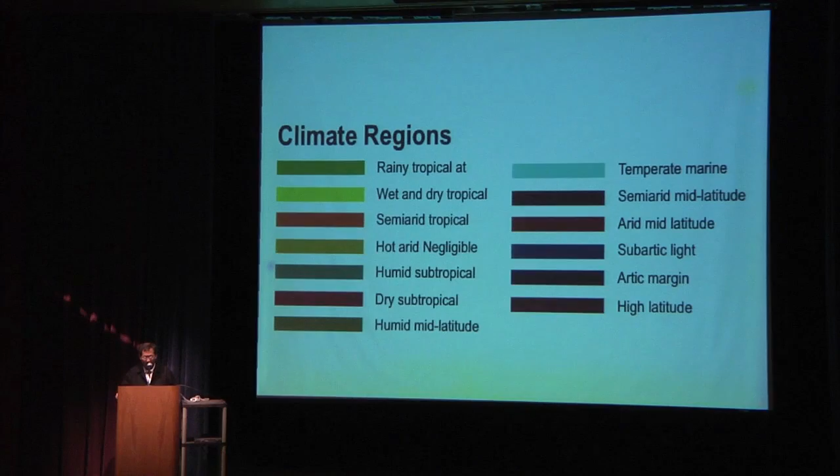Designing to the climate of the locality is another word for bioclimatic design. For me, as a green designer, as an eco-designer, bioclimatic design provides a good starting basis for green design as a passive mode, low-energy design.

If you shape the building right, or design it bioclimatically as a passive low-energy design, then anything else you add to improve its energy performance enhances its performance. But if you don't get the configuration right, you'll have to correct some of the decisions you made earlier, which makes total nonsense of designing a low-energy building. So I see this as the starting basis.

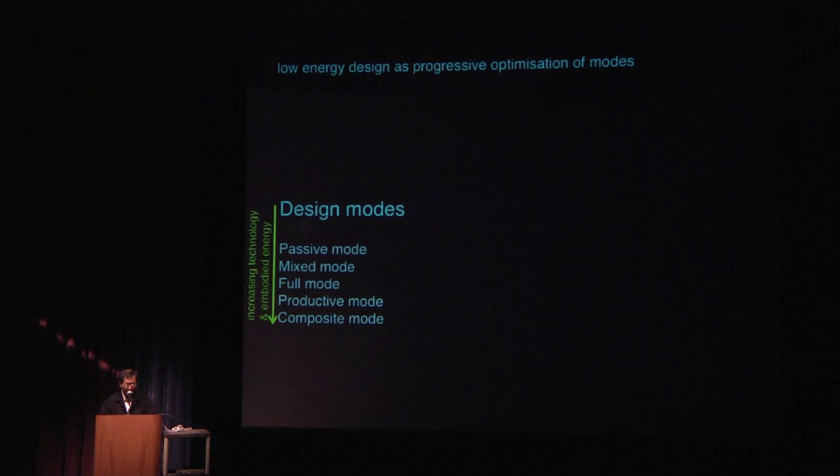Passive mode means improve comfort conditions without the use of any mechanical electrical systems. Mixed mode means improve comfort conditions with some mechanical electrical systems. Full mode would be a conventional building which is full mechanical electrical systems, and productive mode is where you start to produce your own energy, where you use renewable energy sources. Composite mode means you use different modes in relation to the seasons of the year, which would be particularly applicable in temperate zones and cold climates.

And so the basis for climatic design is really comfort. Rather than bore you with figures: passive mode means improve conditions over the outside without any mechanical electrical systems. Mixed mode means some partial mechanical electrical systems, like the use of ceiling fans, for example, meaning an enhanced level of comfort. Full M&E systems, or full mode, would be conventional. Productive mode means you're dependent on the source of energy, the ambient source of energy. And composite mode depends on the variation you adopt for the different seasons of the year.

So this, if you like, is a basis for design, for designing low-energy buildings. Let me just start by looking at passive mode. That means improve comfort conditions without the use of any mechanical electrical systems.

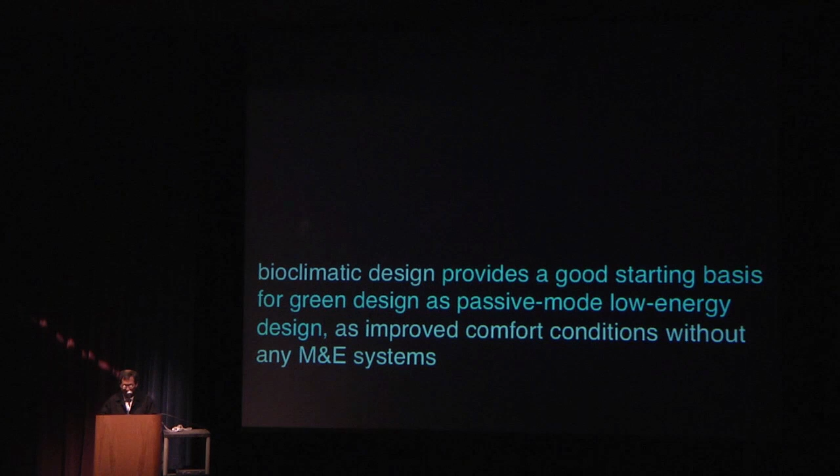You have three seasons in a year, or four seasons: summer, spring, autumn, and winter. Rather than put spring and autumn separately, I put them together and call it mid-season. Essentially, in most climates in the world, you have a slightly higher temperature in summer, in some places extremely hot, and cold in the winter. In your case, it's not that cold, but possibly this winter could have been the coldest you've experienced.

The horizontal line is full mode. That means the engineers, when they design the heating and cooling system, try to have a consistent comfort level throughout the whole year. The red line shows hot in the summer and cold in the winter. Now, when you implement bioclimatic design, you improve the comfort conditions a little bit in summer, a little bit in winter, and mid-season it is comfortable for a greater part of the mid-season—that's passive mode.

Now, what is clear from this diagram is that there's no way passive mode can compete with full mode. So let us have no illusions about bioclimatic design—it can never equal the same comfort level that you experience with full mode.

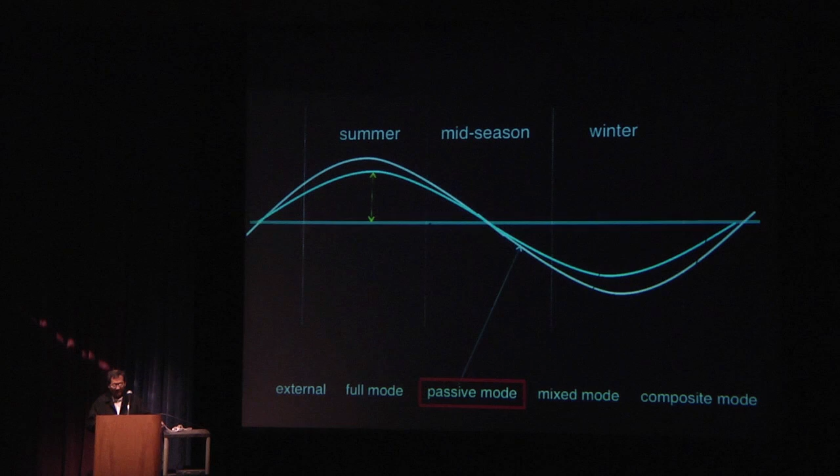Now what does this tell us? This teaches us that if we're happy with improved comfort conditions, as we used to be in the past before air conditioning and heating, then low energy design is a lifestyle issue. That means if we as human beings are prepared to accept a little bit hotter in the summer, a little bit colder in winter, or wear warmer clothes in winter—well, not exactly naked in the summer, but you don't need any mechanical electrical systems.

Bioclimatic design, back to this definition again, is designed to relate to the climate and locality as a passive mode energy structure and by building configuration.

Here's an example of a project. This project's in Kuala Lumpur, which is about 2.9 degrees above the equator, in the humid tropical zone. It's a high-rise building, about 30 plus stories, which I finished a few years back.

This is the sun path for Kuala Lumpur. Well, not exactly, I couldn't find it on the internet, but this is the sun path at the equator. Kuala Lumpur is 2.9 degrees above the equator, so more or less the same. What you see as the characteristic in this sun path is that the sun is essentially east and west, and so those are the hot sides of the building.

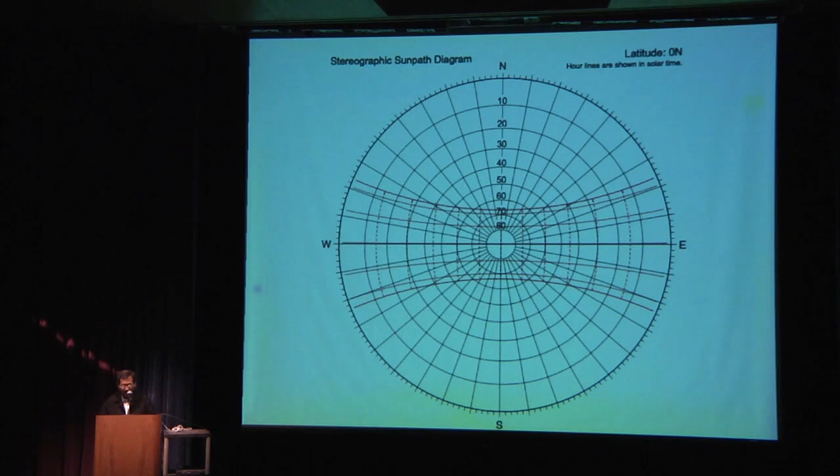I'm not able to put in a temperature profile, humidity, and rainfall in this presentation, but those are aspects influencing the design. If you just look at sun shading, the sun is east and west, and that's the hot part of the building. So when I designed this building, that's the floor plate.

I orientated north, so you can see north is exactly vertical here. The hot side is east and west, and that's where I put the elevator cores, the staircase, and the toilets, so that these serve as buffers between the outside and the inside, taking in the heat, the solar insolation, from the east and west, and from the roof.

You need something over the roof. Then, to enhance its energy performance, I have naturally ventilated toilets, naturally ventilated staircases, naturally ventilated lift lobby, and sky courts that act as sun shading. That, if you like, is my definition of bioclimatic skyscraper - a skyscraper that responds to the climate and locality, in this particular instance, the tropical climate.

By putting the elevators in the lift lobby with an operable window on the outside, and a staircase with an operable window on the outside, you don't have to pressurize the staircase or the lift lobby, which you would if you have a central core in the floor plate. Pressurization means you have to extract smoke and fire in case there's a fire, whereas with the lift lobby and staircase facing outside, the fire authorities will let you get away without pressurizing these elements.

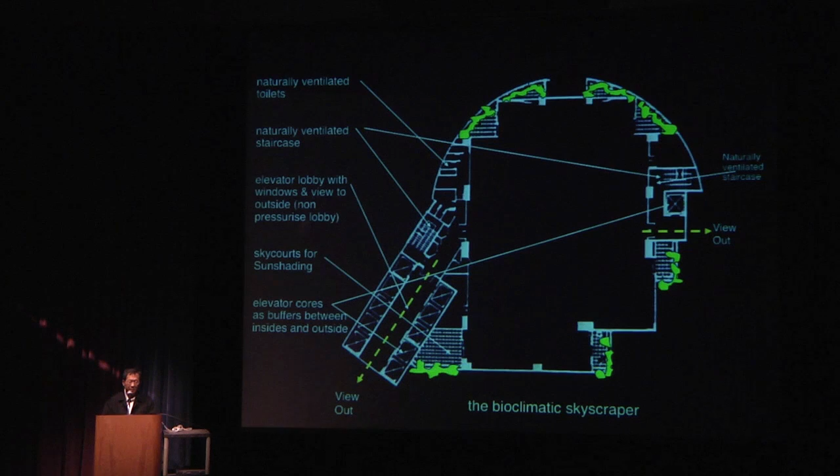Also, by putting the elevators on the outside, you get a view out, which gives you a greater sense of place - when you get out of the elevator, you can see out and say, oh, here I am in Fort Lauderdale or wherever the building is. It gives you a greater feeling of belonging and linking to that place, rather than getting out into a dark and dingy corridor that could be anywhere in the world, or in Baghdad.

So for the hot facades of the building, where I don't have the core, I would put sky courts or sun shading. Usually on the north and south, I don't get an awful lot of sun, so I sometimes have full height glass without any sun shading, but I could push the balcony out a little to give shading for the sun that goes round on the east and west at certain times of the year.

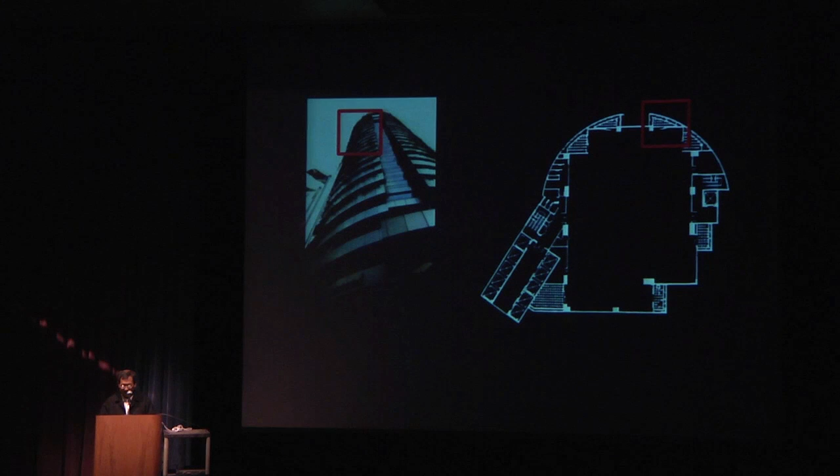I vegetate the sky courts and use vegetation as a means of enhancing the cooling effect on the building. Vegetation studies have shown that vegetation reduces the ambient temperature around the facade of the building where you have it. So I try to cover the building with vegetation. Besides, putting vegetation enhances the biodiversity level of the locality, which is something we should try to do in most, if not all, of our buildings.

I hadn't concluded then that having an ecological connectivity or nexus is better for ecological design. So the second diagram was the one that I adopted in this building.

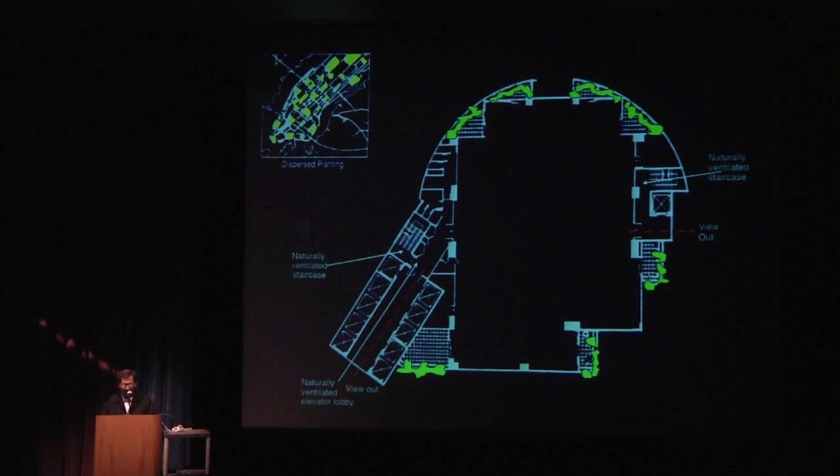You can see the vegetation in the balconies, and the balconies actually go beyond the permitted plot ratio. Sometimes when you put balconies in buildings, you can tell the client that this gives you opportunities to expand later on when the plot ratio increases, or if you want additional office space, you can fill up these balconies.

Back to this definition again, bioclimatic design. Then I've added one other item, which is to take advantage of the ambient energies of the locality. That means every locality has local energy that you can use to your benefit.

In this case, one possible ambient energy is wind. This shows the effects of wind at different urban locations: the first in the urban location, the second suburban, and the third in the open country. The wind exponentially increases as you go upwards. Beyond a certain height, beyond 600 meters or so in the case of urban location, it doesn't make an awful lot of difference—it remains the same, but that's the effect of wind.

So I wanted to see whether I could use wind to cool a skyscraper. The project really started when I had a client who was really mean with his money, and he said, can you design me a skyscraper, a tower on this site, without any air conditioning? I said, I suppose I could do that, if you take the air conditioning out.

Then he said, what else could you do? I said, I have to keep the windows. His idea was that he wanted the people who occupy the floors to come in with their own air conditioning condensers. So I gave a bracket outside the facade where they can put a condenser, and some sun shading to hide the condenser from the outside. That was the system we proposed.

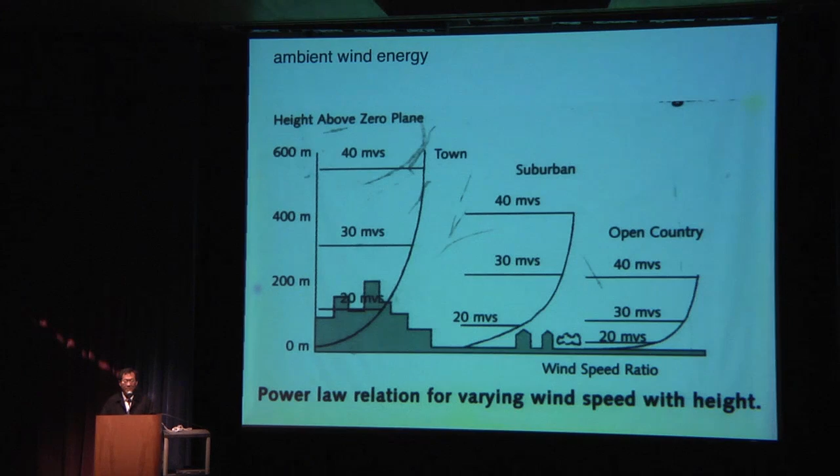But then I said to my lads, why don't we try and design this as a possible naturally ventilated skyscraper using wind. So this was the design for the building—a little bit cranky, but that was me in those days.

That's looking at it sharp on, and that's where the two blades, if you like, are what I call wing walls, to capture the wind. I call them wind wing walls, like a nice Chinese name.

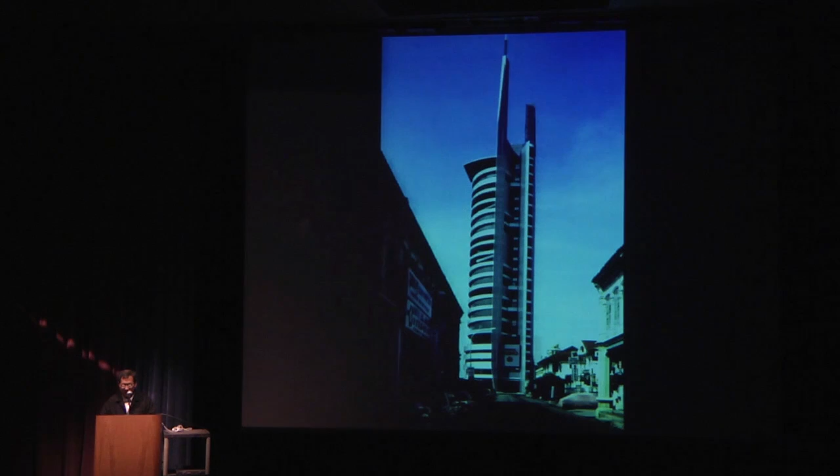So I start by looking at the wind rose for the locality, which you can see on the right-hand side. The wind essentially comes mostly from northeast and southwest, a little bit from the north. It just so happens the site is orientated northeast and southwest, so I lined the building, and that gave me the clues where to put the wing walls.

I started to develop this idea of having a wind pocket, which is like a terrace, with two wing walls on both sides of the pocket that channel the wind in, and where it hits the building I have glass shutters which can open and shut.

This was designed a few years back, maybe about 20 years back, in a building in Malaysia. If this was fully automated it would have been wonderful, but I couldn't get a client to pay for it, and at the time technology in Malaysia wasn't that well developed. Malaysia isn't exactly first world, but it was not third world either—I used to call Malaysia 1.5 world, because you can do a certain number of things, but not an awful lot.

In the bottom diagram you can see the two wing walls, a sort of enlargement of the bottom part of the plan. You can see the elevator cores, the two staircases which are naturally ventilated, and then the wind pockets and the sliding glass, which is where the controls are.

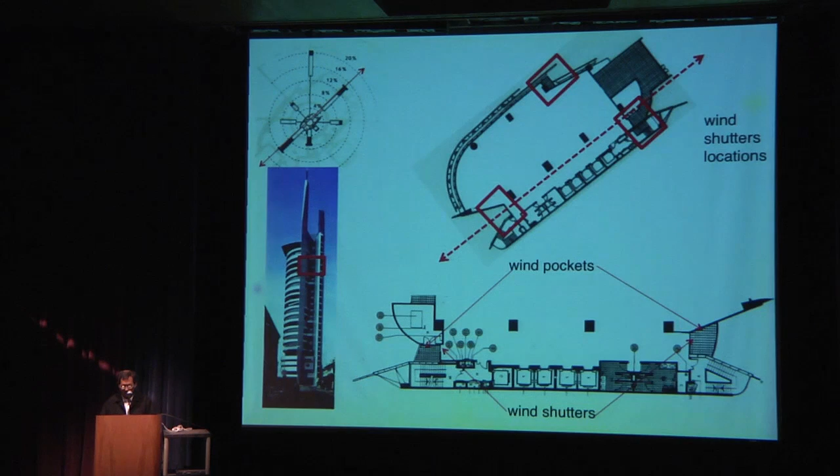So we started to simulate this, and this was done in the late 80s, early 90s. At that time, CFD, computational fluid dynamics, was still very much in its infancy. Of course it's improved a great deal in the last four or five years, where you could actually not just get a diagram, you can see the arrows flying. This was done for me by Professor Phil Jones from University of Cardiff.

And I didn't have the money to pay him, so I said, could you do it for a joke and a pint, which he did.

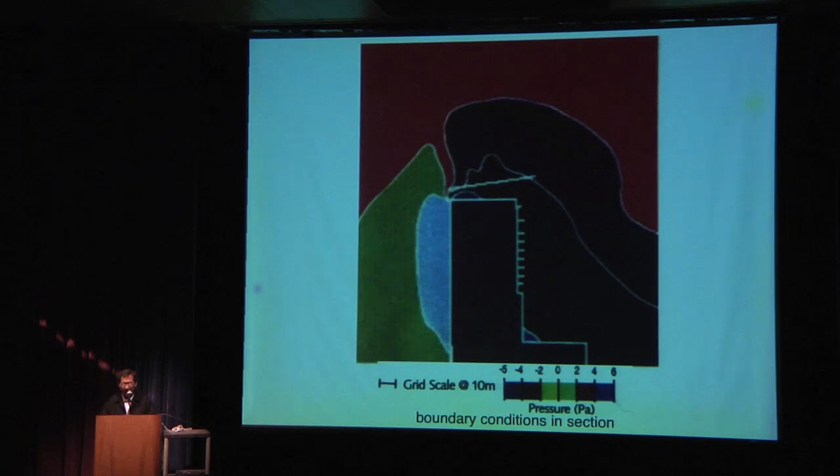And this is the boundary conditions in the section. So next was to look at the boundary conditions in plan. And this is what it is in plan.

And so from there, I started to look at the thermal conditions inside the floor plate. The red squares show where the wind pockets and the wing walls are.

The diagram at the bottom shows the comfort condition when everything's shut. You can see the heat, the red - if you look at the gradation scale on the right-hand side, it's hottish on the inside, and then cooler on the sides facing the outside, obviously because it faces the outside.

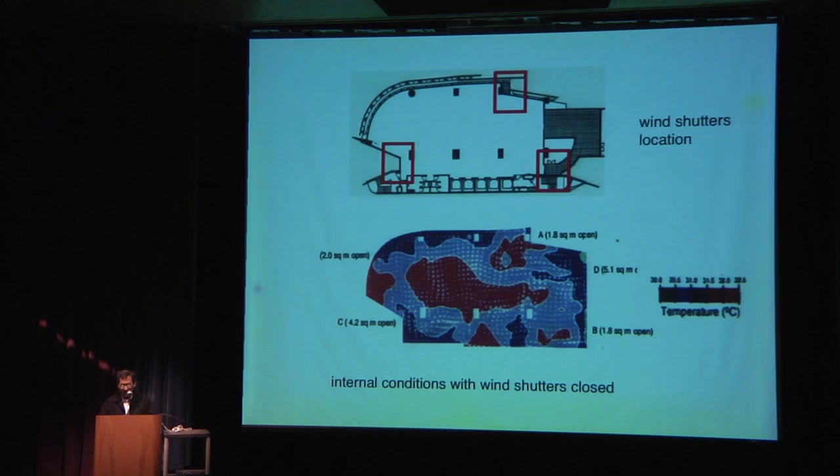So this is, if you like, the idea of a tropical, bioclimatic skyscraper using wind as a means of cooling the building. It's very primitive, it's very intuitive, it's very simple, and through simulation it works.

Now, I haven't been able to do a post-occupancy evaluation to prove these figures. At that time, I couldn't find anybody to do it, but obviously today I have local universities who have a lot of expertise now to do it.

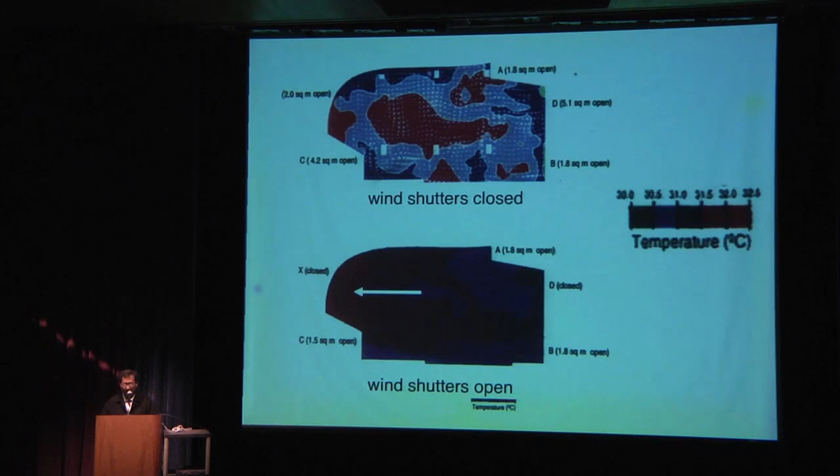So imagine if this was automated, and the shutters automatically open and shut, with a wind anemometer on the outside measuring wind speed, and everything computerized so that every floor is different - because every floor has different wind speeds acting on it, and every wind pocket has different permutations. This becomes the basis of the naturally ventilated skyscraper.

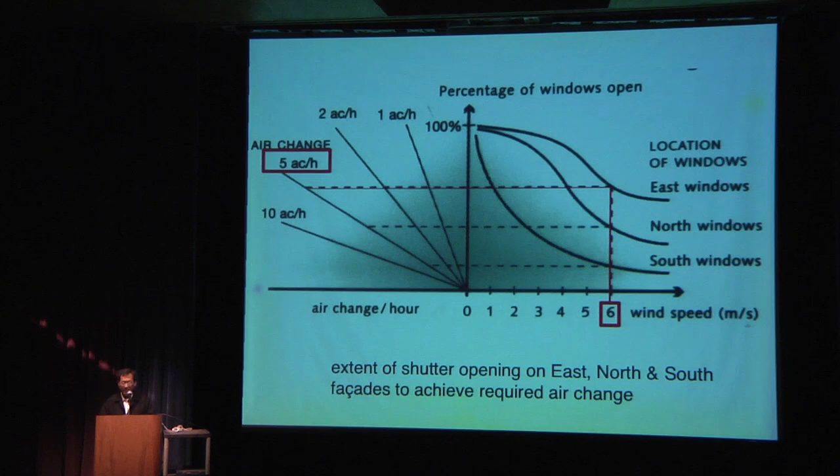Now, what about mixed mode? Mixed mode means some mechanical and electrical systems, which means further enhanced comfort condition beyond what is on the outside.

This is a scheme that we finished about 5 years ago. It's 2 tower blocks of apartments with a retail between the both of them.

Now, this project, from the time I got appointed, took me 15 years before it started on site. So you can see architecture is no man's game, and you must have the stamina to sit it out and not sue the client if he doesn't pay your fees.

In fact, I did 3 sets of building plans for this project, got paid for 2 and not the third one. And on the far left, the building with the step planters was a building that I did much earlier.

It's an IBM building, and you can see the blue stripes reminiscent of the IBM logo. But the client wanted to save costs on the retail. So I said, okay, I'll design you a naturally ventilated retail so that the public areas are not air conditioned, it will be naturally ventilated.

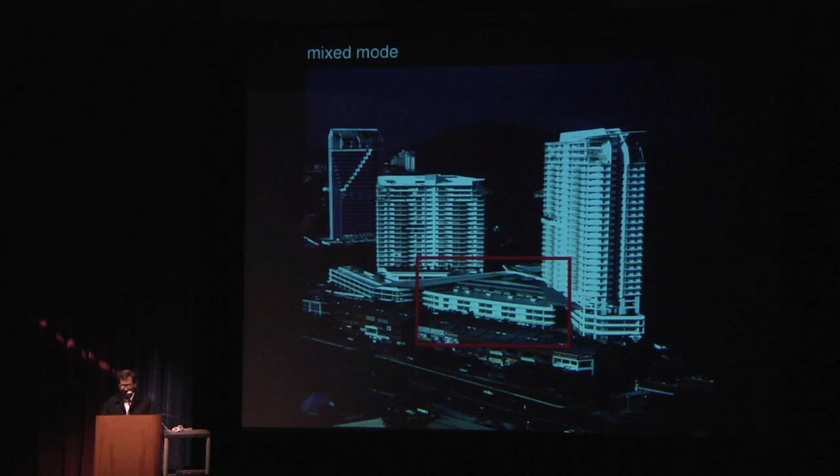What I have is a canopy over the retail area, and the retail has 3 very large wind turbines, if you like, wind extractors, that suck the air out to cool the space below.

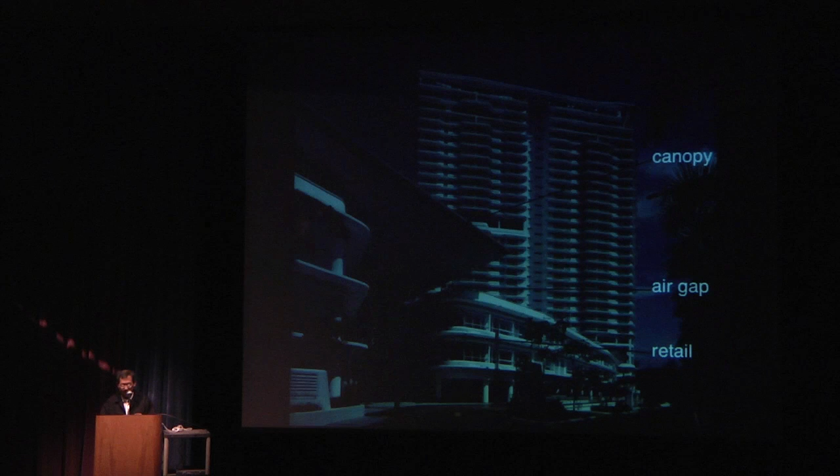If you're looking at the project from the main road, you can see the retail as 3-story units, and then you have this canopy on top, in which there is an air gap between the canopy and the retail.

Inside the retail, inside this canopy, as you look up, there's a skylight, and within the skylight are the 3 air extractors. They're not modest, they're huge, nearly 2 meters in diameter. The central space is where I have an elevator going down to the basement.

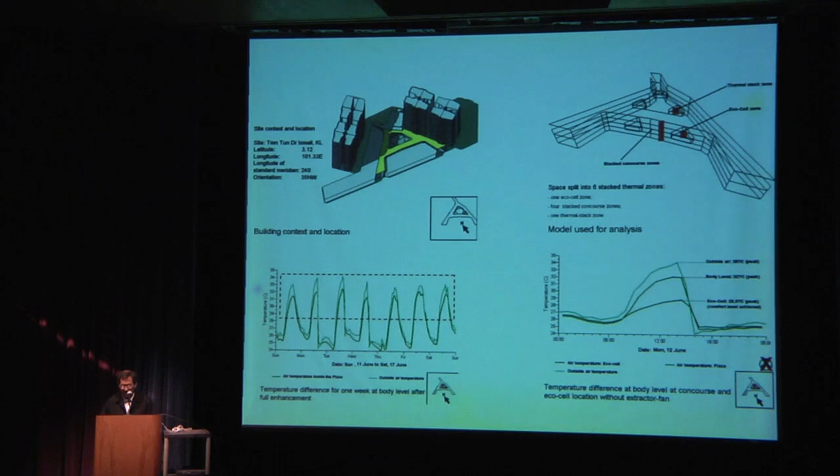So these were some of the simulations done for me. When this was built in 2002-2003, I had Professor Shireen from the International Islamic University in Malaysia, who did her PhD on CFD analysis, and she had a team simulate this for me.

She showed that this could work, and looked at the Y shape you see on the left-hand side, which is actually the public areas inside the retail. The bottom left-hand diagram shows the comfort condition.

The crosses show the condition with the wind extractors shut, and the right-hand side with a tick shows the wind extractors moving. You can see there is some improvement in comfort condition.

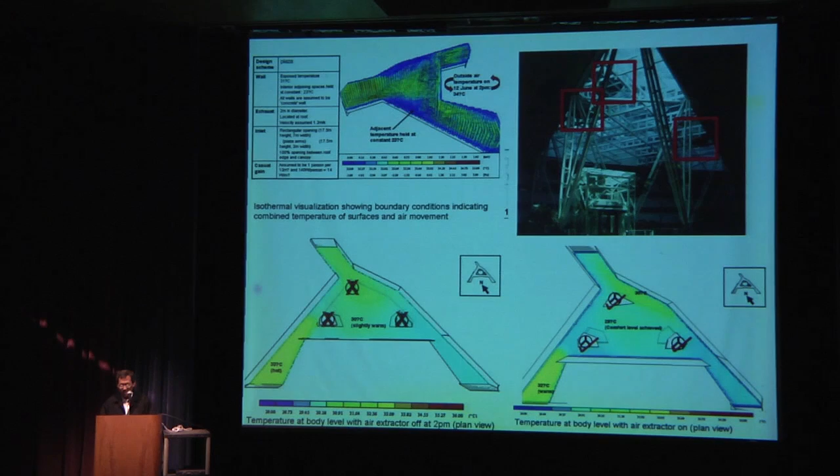From there, we had to modify the design, reducing the gap between the canopy and the top of the retail to enhance its performance. So the simulation helps in the design, but you have to do it through a series of reiterations—simulate, change your design, simulate, change your design.

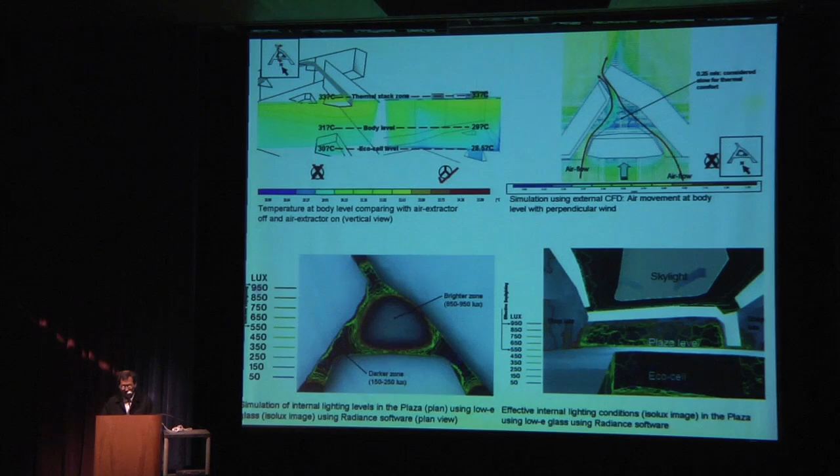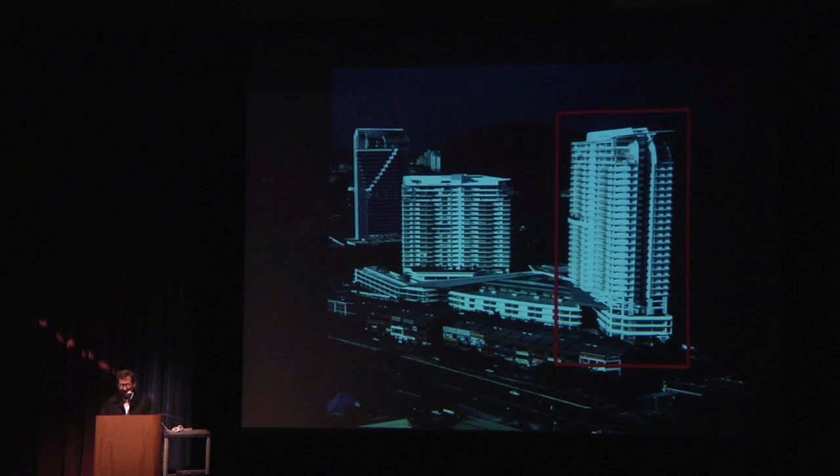The biggest problem of designing apartments is how to get natural ventilation and daylight into the back parts of the apartment, because if you have a corridor that joins the facade to the back wall of the apartments, you don't get ventilation, and you have to mechanically ventilate the toilet or kitchen at the back.

So what we did in this scheme was have a central corridor and then a series of voids that cut all the way down to the ground, to ventilate the toilets and kitchens at the back of the apartments.

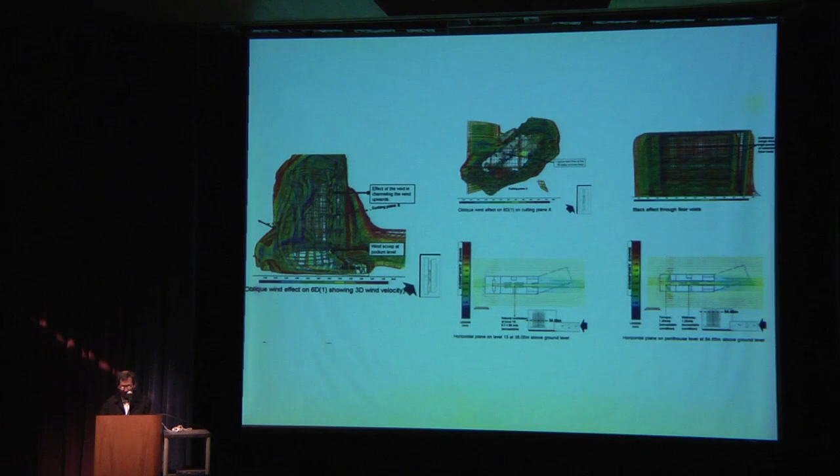The next step was to simulate whether these would work, and these were some of the simulations done by Professor Kasim and her team. You can see the section of the building on the left-hand side.

The idea would be that you would suck in the air from the bottom of the tower, between the tower and the podium, and bring it up through these air wells. You can see the first colored diagram in the middle on top.

You can see the gradation of temperature and comfort condition on the left-hand side, showing we can get a reasonable level of comfort through natural ventilation, through the wind blowing into the building.

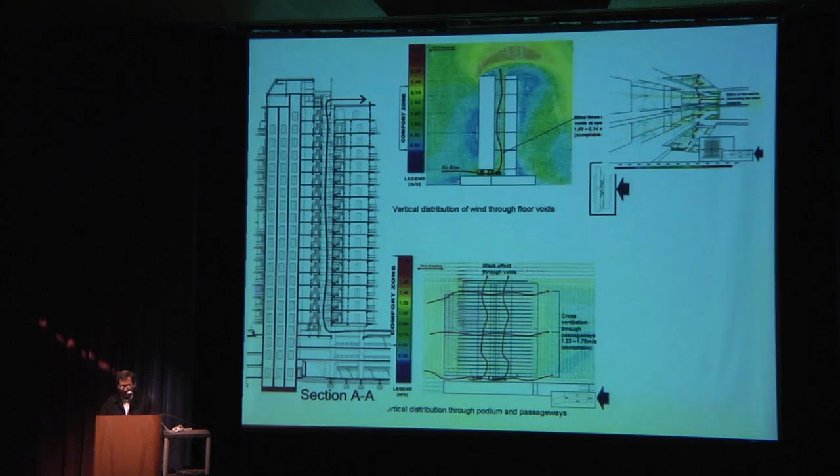So in this way we use CFD and wind to try and design a naturally ventilated tower, or naturally ventilated apartment building.

We did this to show the client, because the client, being a rather conventional developer, said take out the sunshades, we don't need those, because all your other architect friends don't have sunshades on their buildings.

So I explained the importance of sun shading, and finally he relented and said, all right, put the sunshades in, because I said it was part of the aesthetic. And sure enough, when he started to market the units, purchasers are not stupid.

Purchasers will look at the shape of the building, look at its orientation, and say, isn't that the hot side of the building? If it's the hot side, then we won't buy the unit.

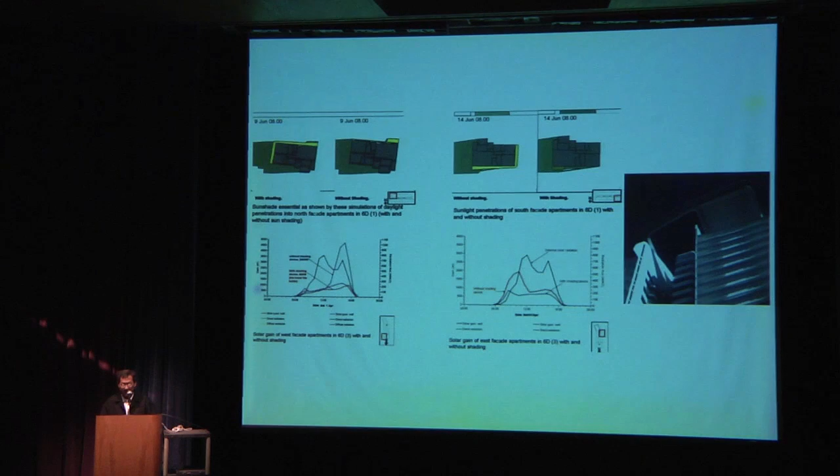The developer came back to me and said, bring out your sun shading diagrams, and actually used it in his marketing office to sell the units, saying our architect has really studied the impact of sun on the facade and showed the sun shading.

So we talked about passive mode, mixed mode, and I don't need to tell you about full mode, you know this better than me. Productive mode is the use of photovoltaics and wind energy. And I'm going to talk a little bit about composite mode, which means different methods of designing a low-energy building for different seasons of the year.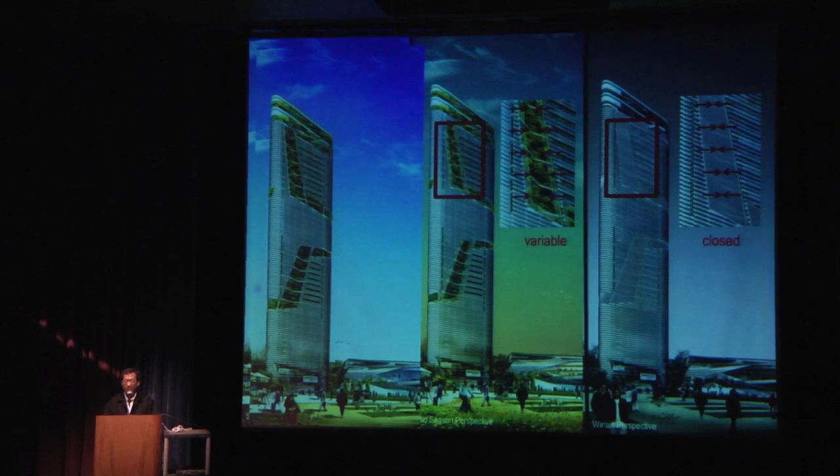So you have the summer condition on the left-hand side, mid-season in between, and in winter the atriums become winter gardens and are totally sealed up. I have operable shutters over the atrium. In the mid-season it varies in its opening, and in winter it's totally shut to keep the heat in, or if you need to in summer, you shut it to keep the air conditioning in.

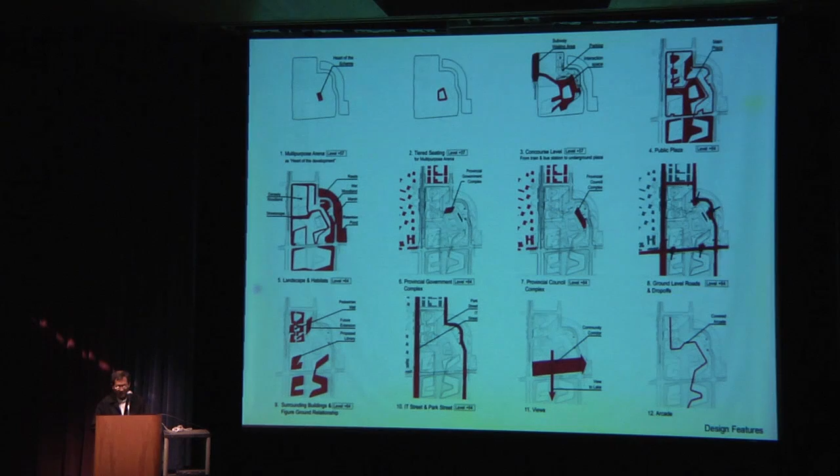This is the project in Gyeonggi, about half an hour from Seoul. We did the whole master plan plus the building, plus the tower. These were the urban design drawings we did to show the heart of the development, the pedestrian areas, and so forth.

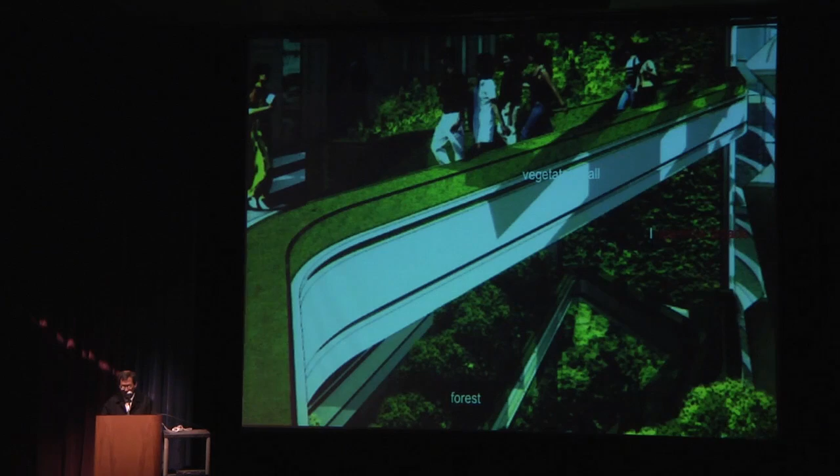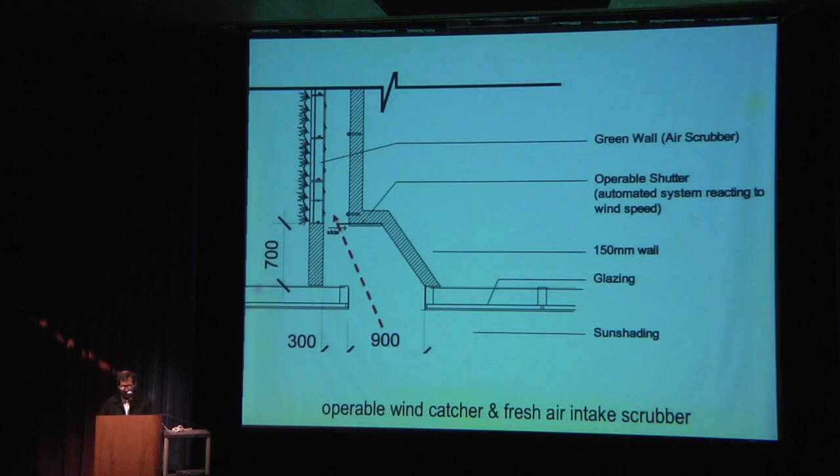At the sides of the atrium, we have what we call a device we developed called the wind catcher. That means you have glass on both sides, it catches the wind, goes in, then you have shutters which are automated, controlling the wind entering the building. Then the wind is scrubbed by the vegetated wall, using vegetation as a cleaner, as a filter to the air that comes in before it enters the air conditioning system.

Putting vegetation in buildings is not a decorative thing to do, it actually enhances and is good for the environment. An ecologist sees the Earth as covered by a thin film called the biosphere. Within the biosphere, there are units called ecosystems, and within ecosystems you have communities of plants and animals and a physical environment - in ecosystems defined as biotic constituents and abiotic constituents acting together holistically to form a whole.

Now, the trouble with most of our buildings today is that they are abiotic, totally synthetic and inorganic, totally devoid of any biotic components. If we continue to build this way, our world becomes increasingly synthetic and artificial. So by bringing in biotic constituents, we enhance biodiversity and also reduce the heat island effect of cities. Studies have shown that without vegetation, certain parts of the city can be 1, 2, 3 degrees higher than the countryside, sometimes even more.

But our approach to putting vegetation in buildings is not just plonking any old bit of landscaping into the building, but creating habitats as viable living systems. The idea was to make the building like an artificial ecological system, to make it like a living system. So we look at the biodiversity level for that particular locality - Seoul is fairly biodiverse, and similarly Fort Lauderdale has a fairly biodiverse environment.

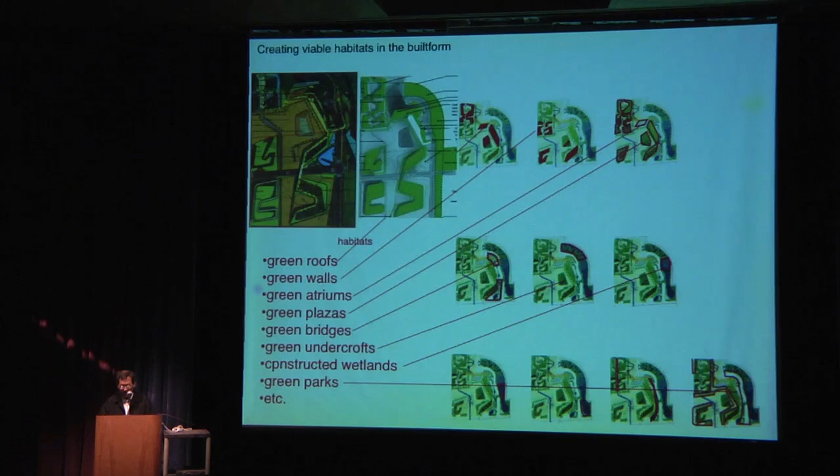And these are the habitats we create. The habitats could be green walls, green roofs, green atriums, green plazas, green bridges, green undercrofts, green constructed wetlands, and green parks. So our design isn't just putting the inorganic mass of the building, but trying to create habitats so that the whole development becomes like a living organism with enhanced biodiversity. These are the different new habitats we create in the design.

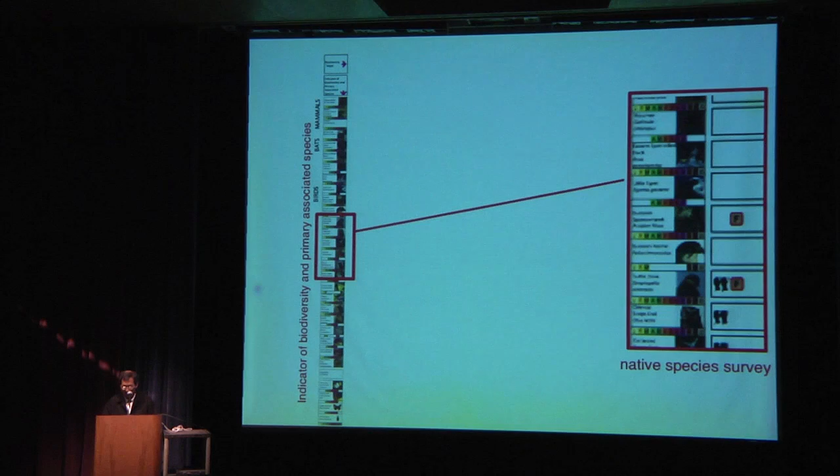We do research with an ecologist on the flora and fauna of the locality, and that provides the different species on the vertical axis. Then we try and match them and ascertain what sort of conditions we need to make the habitat successful and survive over the entire year.

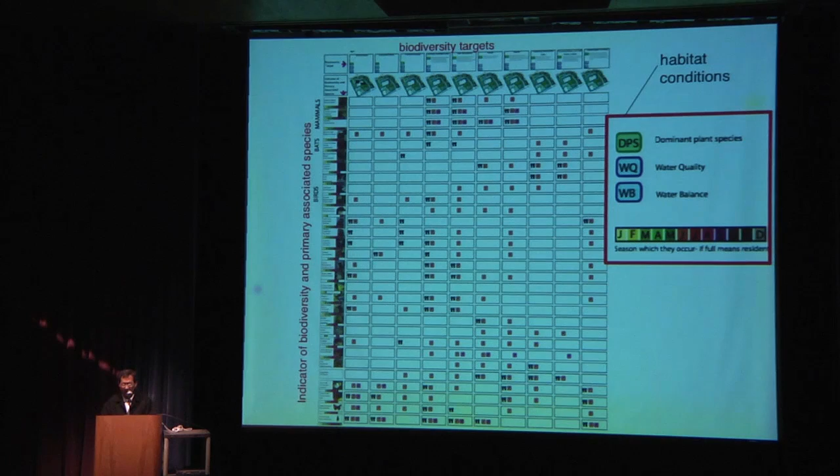In this way, we establish what we call biodiversity targets for different habitats within the development. It's not an easy task, and it requires maintenance and attention by the gardeners to make the whole project work as a living system. That's what I think we should be doing, to design our developments and buildings as living systems. So that's the master plan, and that's the tower—the idea of the development as a living system.

This is a project in Singapore called the Solaris Project. Singapore is spot on the equator. It is called the Solaris Building. You can see Fort Lauderdale at 26 degrees. One of the requirements for getting the equivalent of LEED in Singapore is called Green Mark.

One requirement is to replace the ground cover of the site within the building. Obviously, to do this you would lose gross floor area if you cut voids in your building, because you only have a limited permissible building form. This shape of the building is actually the permissible building form that was part of the urban design guidelines—I didn't gratuitously shape the building this way. We just optimized it by pushing it right to the edge of the permissible building envelope.

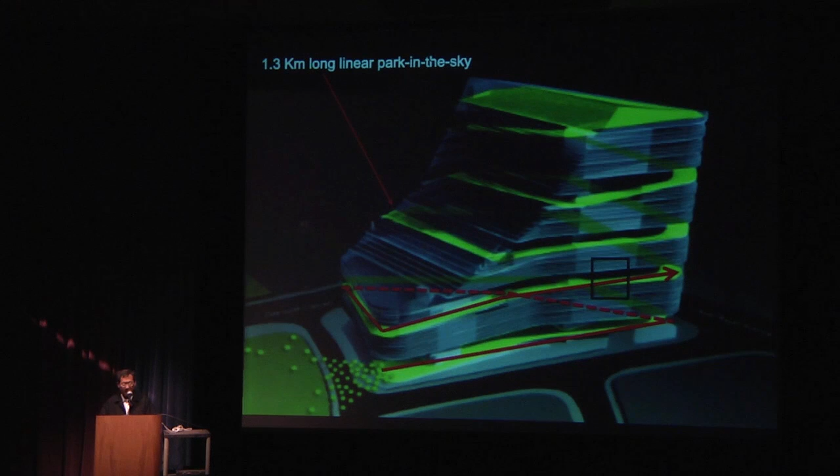By doing it this way, if you stretch out this vertical linear park, it's actually 1.3 kilometers long—probably the longest vertical linear park in the world. This was an interesting experiment, but by putting this on the facade, we avoid cutting into the building form, and we're able to achieve more than 113% replacement of the ground cover in the building form, which exceeds what is expected.

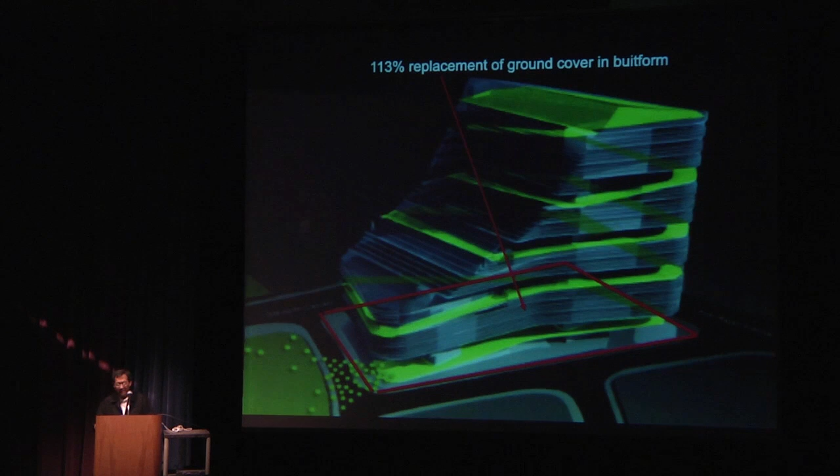That's what we should try to do as designers. We shouldn't just meet the specified LEED level and stop there—we should try to exceed it. This is what a lot of my friends are adopting, what they call the Living Building Challenge, a performance-based set of criteria for green buildings developed in the Cascadia region of the US, between Portland, Oregon, and Seattle. It's a performance-based rather than prescriptive-based approach to green design, so we should exceed it rather than just address it.

And so as the linear park moves at one floor, here's a terrace, then moves at another floor, here's a terrace, until you reach the top of the building. And this is what it looks like on the master plan.

The original master plan was done by Zaha Hadid, and I'm afraid the buildings don't look very similar to what she originally designed, but that's the real world.

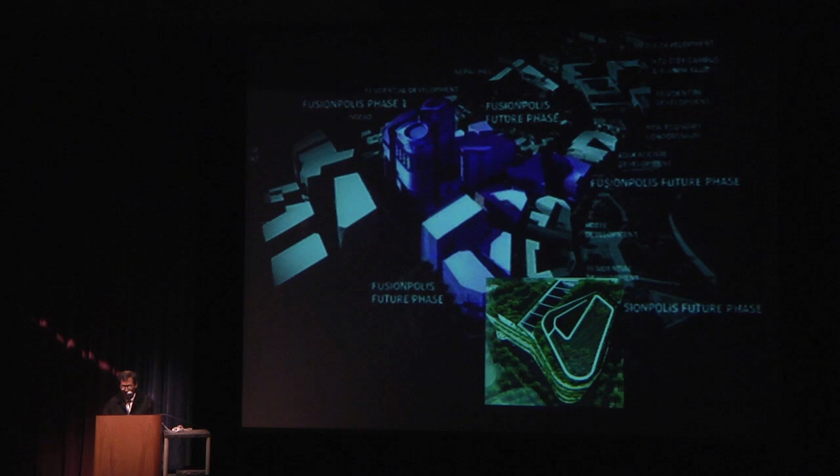So this was our concept drawing of the building at the design stage. Here you can see that the vegetation is integrated with the inorganic parts of the building. We wanted to bring it all the way down to the ground, not just to the ground, but also into the basement as well.

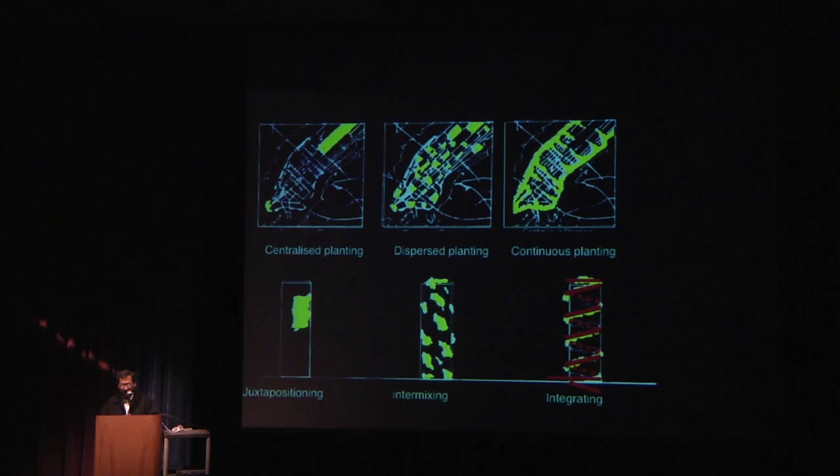And so in the basement we have what we call an eco-cell, which is basically a cell that lets daylight into the inner parts of the building, daylight, wind, and so forth.

This was our competition scheme for Kowloon Waterfront, which if you read the architecture newspapers last week, the second round of this competition, Norman Foster won the scheme. But in our scheme, we had these eco-cells.

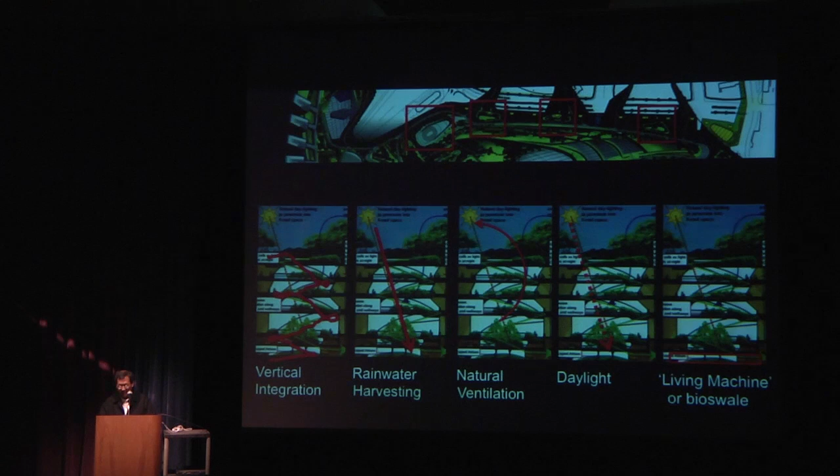And the eco-cell does a number of things. It brings vertical integration of vegetation into the basement, provides opportunity for rainwater harvesting, brings natural ventilation to the inner parts of the building, daylight, and you could put a John Todd's living machine at the bottom if you could.

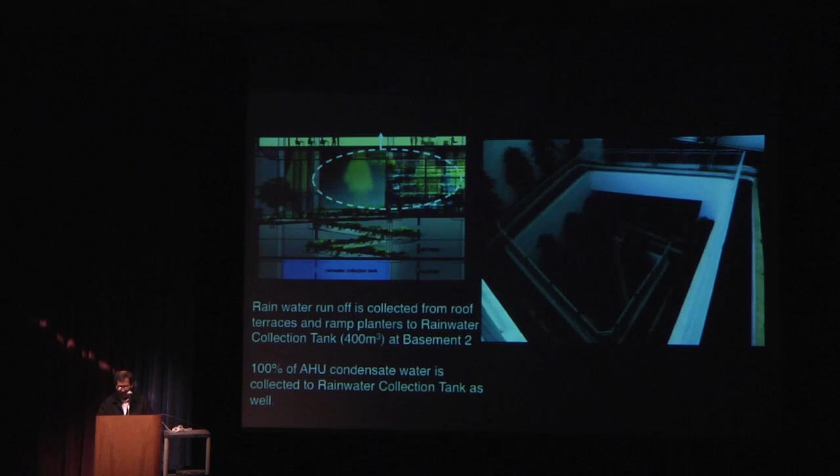At the same time, we harvest the rainwater, and we collect the condensate from the air conditioning system so that the water is not drained away, but is recycled for irrigation purposes. Now, to further enhance the energy performance of the building, we made the ground floor naturally ventilated.

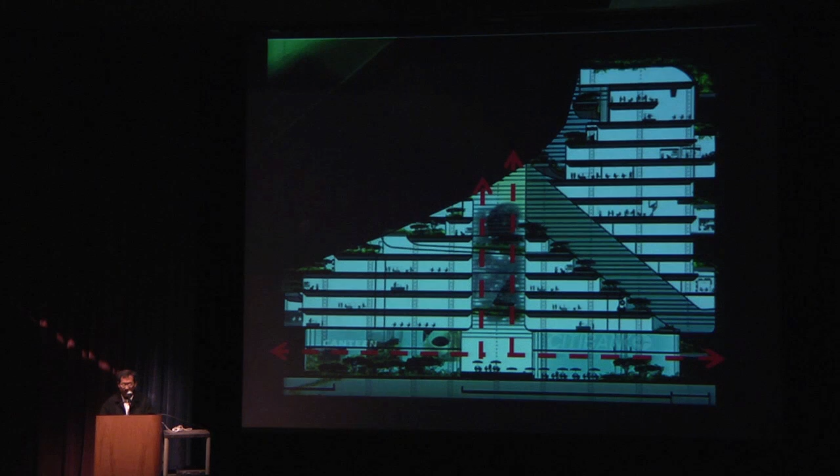And to make this work, because it's quite a deep floor plate, we cut a hole in the middle where we have the atrium. So the idea was that the ventilation would go into the ground floor and go up the atrium.

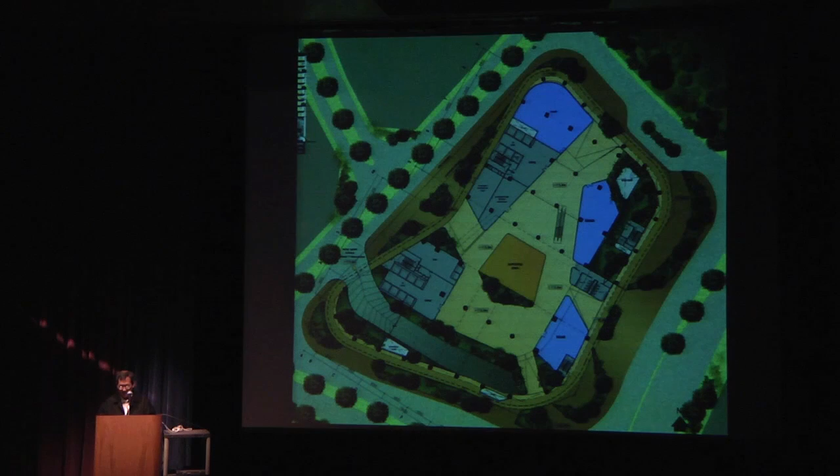And this is a plan of the ground floor. You can see the openings on one side, on the other side, and on the southeast.

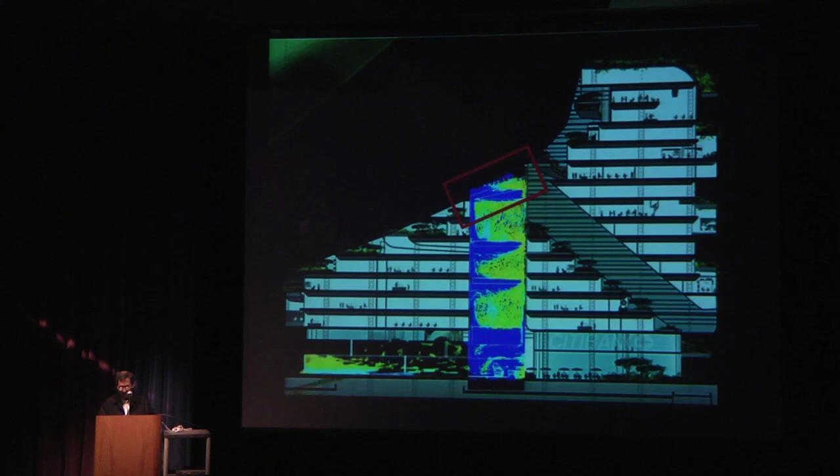And this is a simulation of the temperature inside this atrium. But on top of the atrium, we had to let the air through or let the light in. And so at the top of the atrium, we had operable glass louvers.

This is what the atrium looks like when it's completed. The louvers are automated so that during normal days, all open, and then during inclement weather, it closes to keep the rain out. This is a close-up of the operable shutters.

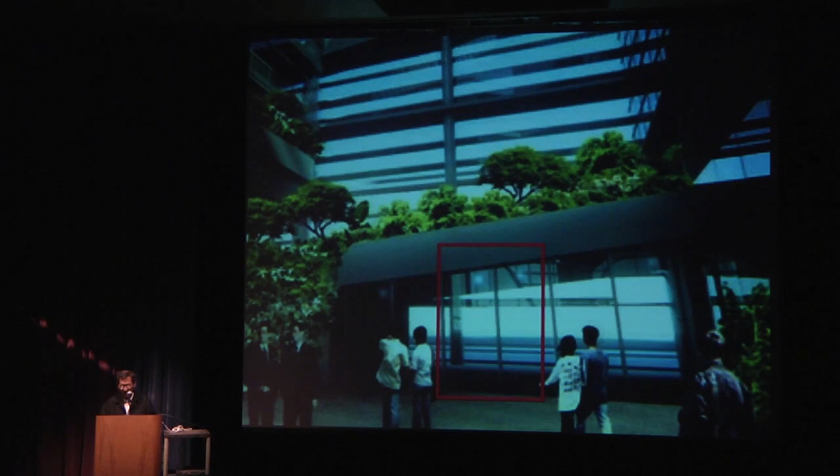Now, how do we do this with the vertical plane? Because wind and rain are, if you like, enemies with each other. The wind can come in, but if it rains, it brings in the rain as well. So how can we design a wall that lets in the wind and keeps out the rain?

And so we developed what we call the rain-screen wall, and that's what it looks like on the ground floor. The initial design was just a vertical piece of glass, which obviously doesn't work in ventilating the ground floor.

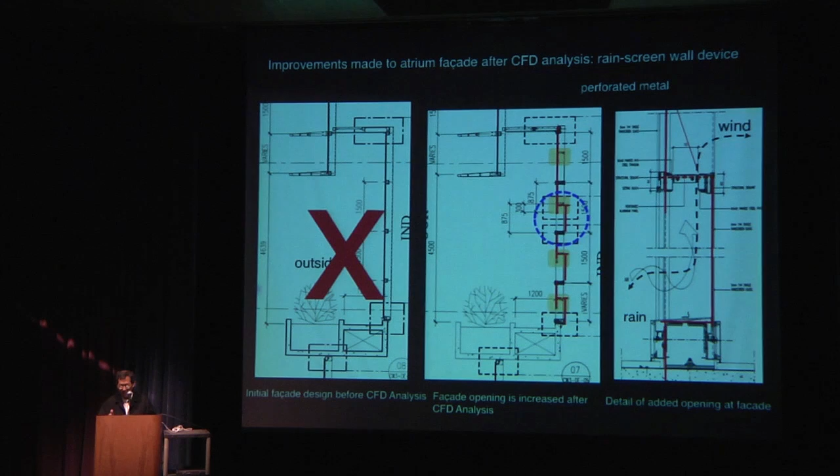And with the facade consultant, we developed the idea of a ziggurat wall. All the vertical components are glass, so you can see out. The horizontal is perforated metal. And when we built it, instead of having the in-between component vertical, we angled it, so you can see we have the angled glass, and the horizontal component is perforated metal.

And so this lets in the wind, but when the rain hits the perforated metal, the wind has little eddies that keep out the rain. So this was a system that lets the wind in and keeps out the rain. We call this a rain-screen wall that we invented for this project. Right now, we're doing on-site post-occupancy evaluation to see how effective this could be. This has been in our design.

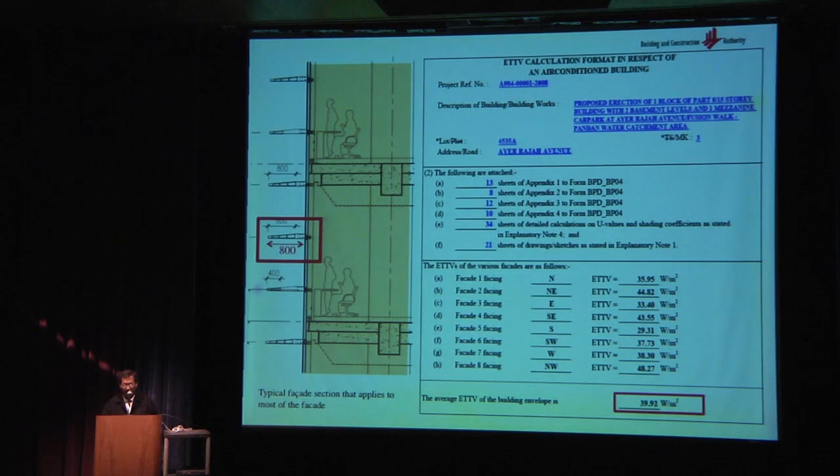The facade is protected by sunshades, which are not modest sunshades, they're about 800 millimeters wide. And in Singapore, they have this index called the Envelope Thermal Transfer Value, ETTV, and we have to meet a certain target, not more than 40 watts per square meter. Here we are well within, well, not exactly well within, we're about 39 point something, so we're within the permissible level of the ETTV.

This is the ground plane. You can see the walkway around the building that people can walk in some level of comfort, and the sunshading that goes down almost to the height of a building, of a person.

And that's the sunshade going around the edges of the building. One of the ideas we had in this scheme is what we call the light shaft. Here we cut a void that goes all the way from the last few floors, cutting all the way down, so that when you walk past the building, you're not looking at a flat facade, you can actually look up and see the building.

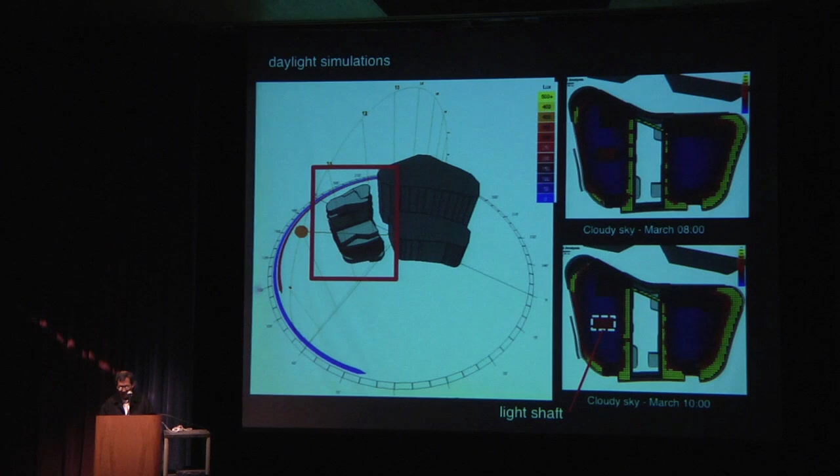This was a simulation of the lighting level by our consultant. On the left-hand side is the image of the opening of the light shaft. You can see the light shaft hits the ground, and you can look up. The image on the right is the view as you walk past the building. You can look all the way up and see the sky.

You can see the in-between floors. You can see the atrium on top and the glass roof. This was an experimental idea, and we think we could develop it a bit further. This is a simulation of the lighting level and the light shaft.

The engineers calculated for us the energy and water savings in this building. It works out to be about $530,000 US dollars per annum, which works out to approximately $1 US per square foot. That means you can get a return on investment of about 5 to 8 years to get your money back on the cost of making the building green, and then continued savings after that ROI period.

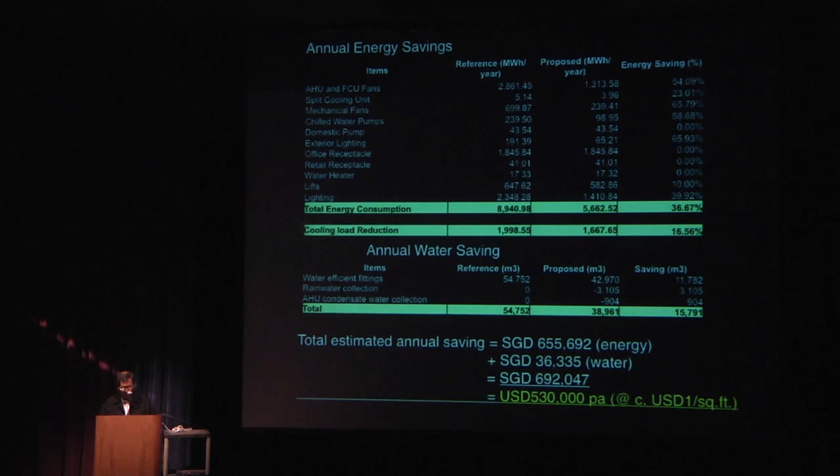The question I get asked all the time is, with all these green buildings, does it cost more? How much does it cost to do a green building? Our client tells us that the cost of achieving green mark platinum—and our design actually went beyond platinum level, platinum being 75 points, we got 77—

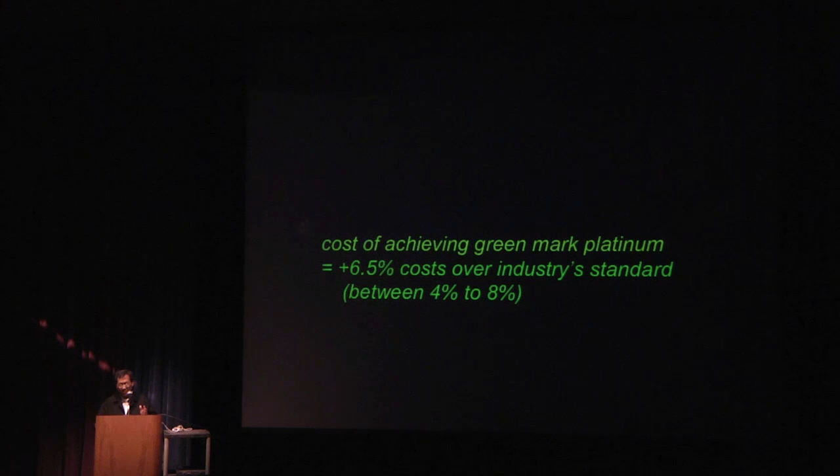was only 6.5% over industry standard for this building type, and our cost consultants said it should be between 4 to 8%. So in principle, if you design a LEED building, you should be able to get Green Mark Platinum between 4 to 8%. But that means thinking green design from day one, rather than designing a building and calling the engineers in afterward to ask them to make it green or achieve LEED accreditation. You have to start thinking green design from day one to achieve these figures.

Here's an idea I started to develop when looking at planning, whether for a subtropical city or any other city: I saw green design as the integration of 4 eco infrastructures. My contention is that designing a green building or green master plan, there isn't just one single way to do it. There are multiple ways, provided you get there, because it's still early days for us in green design. A truly green building doesn't exist yet, but we could try to make them as green as possible, using as much clean technology as we can, technologically and with other systems.

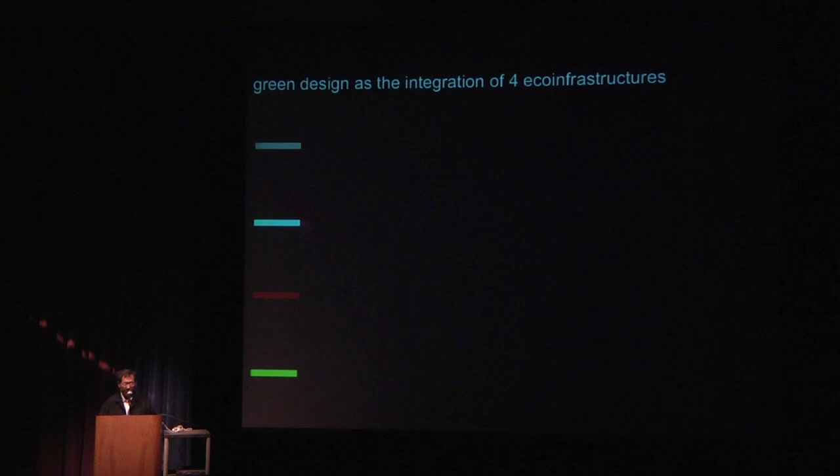So this is an idea that I had, that green design is the integration of 4 eco infrastructures. I call them the gray, the blue, the red, and the green. I color code it so it's easier for me to explain the idea to my designers. Gray is the engineering systems—of course it has no inference on engineers being gray people, nothing derogatory, it's just using the color.

Engineering systems means the infrastructure, the energy systems that you adopt. You should have a smart grid using an IT network that can automate as much of your information access as possible. For instance, a smart grid could tell you whether there's a traffic jam further down the road so you can avoid it. Or you can use your handphone to dial into the alarm system in your house, or switch on the street lights, and so forth. It's essentially eco-technology or clean technology.

Your transportation system has to be green, and waste management and so forth, renewable, automated, clean tech, carbon neutral, and recycling - these are some of the characteristics. I don't want to prescribe a particular system here because technology changes so fast. All I want to say is that yes, green design, we've got to have engineering because we were used to a certain standard of living, but let's make it as green as possible, use renewable energy, increase automation and efficiency, technology, clean technology, make it as carbon neutral as possible, and design for disassembly, design for reuse and recycling. So the first eco-infrastructure is gray.

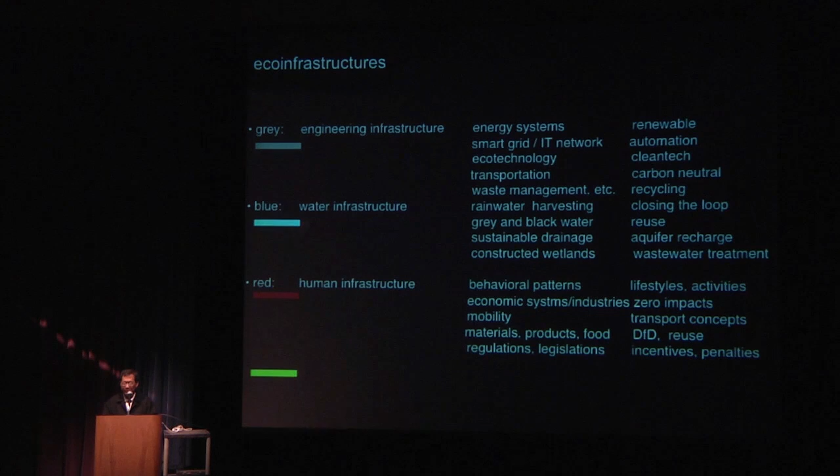Third is us as human beings. I mentioned this a little bit earlier on, saying that we as human beings have to change our lifestyles, have to change in the way we move about, in transportation, our needs and patterns of living. I was told, for instance, that our diet has to change.

I was talking to a dietitian the other day, a Japanese gentleman, who said that actually eating beef contributes to 20% of climate change. That's very difficult to see it that way, but obviously, in order to rear cattle, you've got to clear the land, so that reduces the cover. Then you have to feed the cattle with corn, which they have to grow somewhere else. And then the flatulence from the cattle actually further affects the climate. So we have to change our behavior.

We should not keep buying things which are unsustainable. We should have organic lifestyles and green clothing, if you like, and green materials, and have things that we should try to use. I tell people not to give me any presents for my birthdays and Christmas that I cannot use - which means over the last 10 years I keep getting socks and handkerchiefs for Christmas.

Sorry, that's true actually. Then...

Our economic cycles and industry have to become green. We should actually go beyond just doing green buildings for our clients. We should tell the client that just because you've done your green building, your industries shouldn't continue to be polluting. You should make your industries, whatever industry you're in, whether it's manufacturing or banking or whatever, to make those green as well. In this way we have a greater influence as experts and as designers.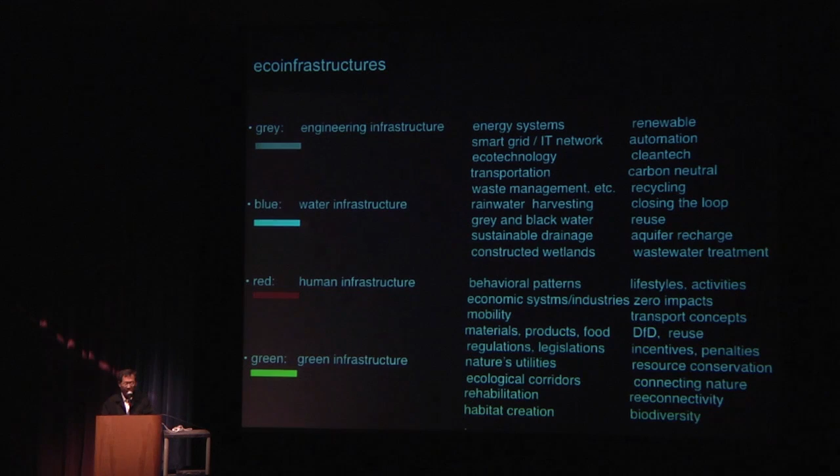And so this is a way of looking at green design, the integration of these four eco-infrastructures into a scheme, into a system.

And that, if you like, determines the aesthetic of the scheme. And so we start designing the scheme with the green infrastructure, and then everything else is overlaid on top or underlaid on top. And so from this, the green infrastructure

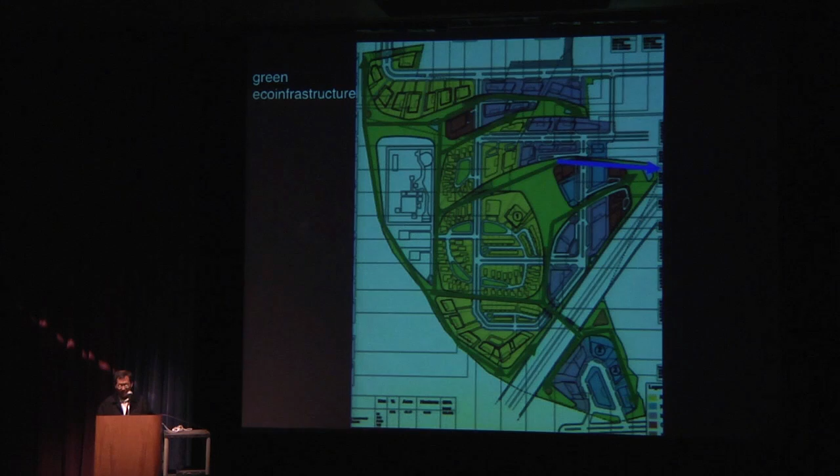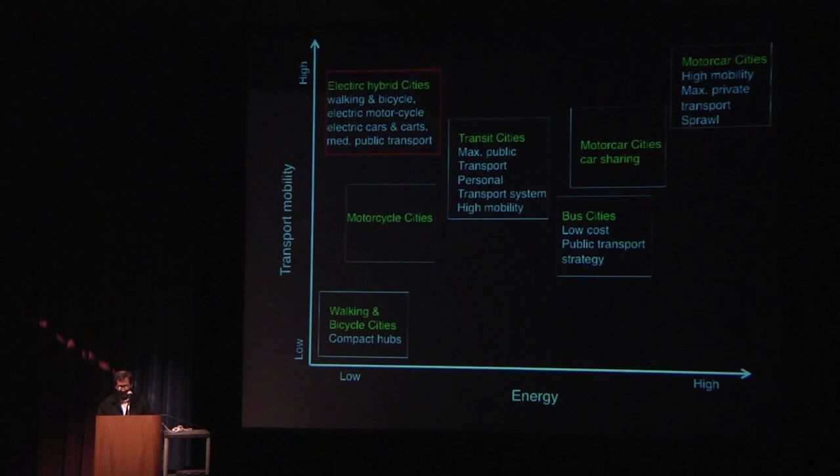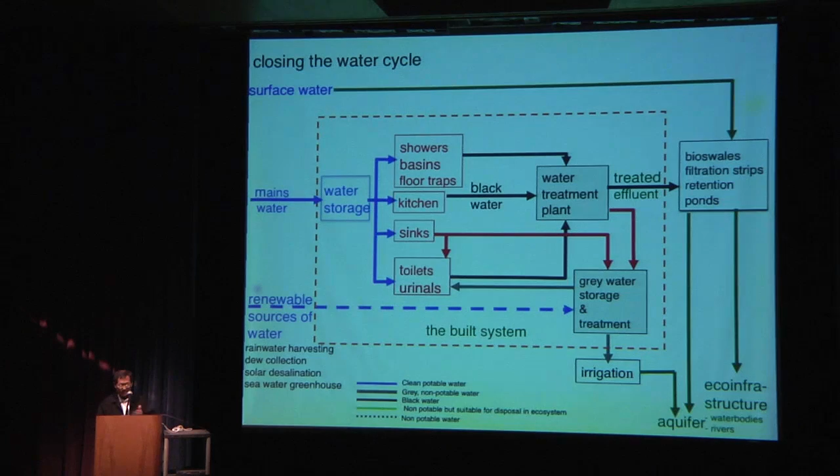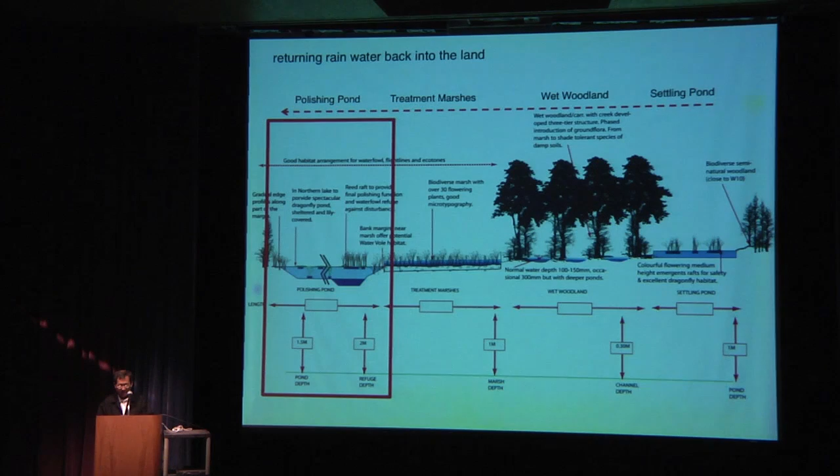And if you like, it's a version of John Todd's living machine. And this is in a series of open ponds in the landscape.

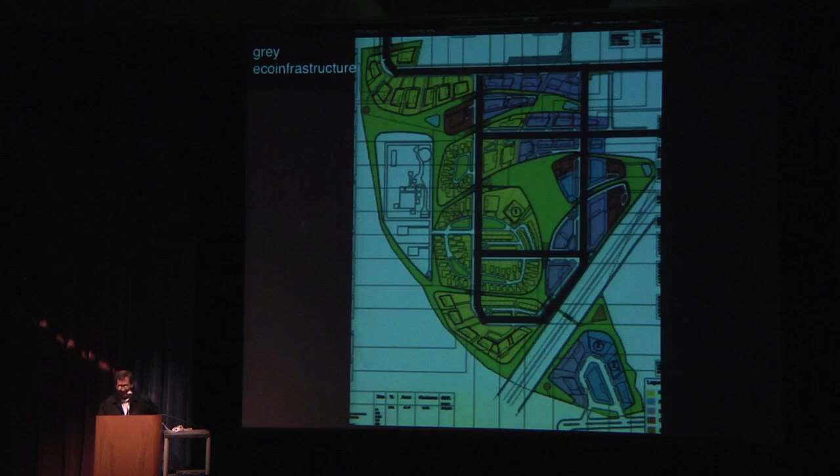And of course, that's the grey infrastructure, which is the roads and the electrical systems and the distribution systems and the telecommunication and the IT systems.

But the problem is that as you start to mesh all these together, integrate them together, you find that there is crisscrossing. And if you want to maintain the ecological nexus of the green eco-infrastructure, then you cannot let any roads cut it.

Once you cut it, you lost the connectivity, and you end up having roadkill.

Species that try to move from one part of the site to the other part gets killed and driven over by cars. And so the idea we had with this scheme was to have what we call the eco-bridge.

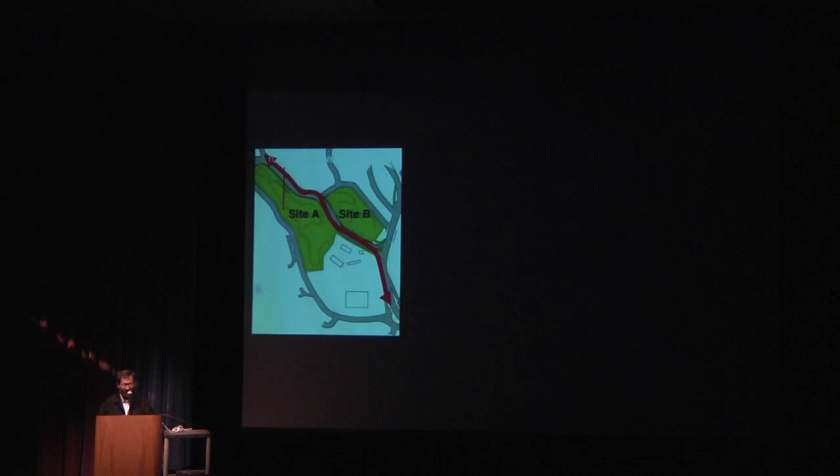And for instance, if you have two sites, A and B, which are separated by a highway, the idea would be the bridge across is vegetated.

So you increase the biodiversity of both the two plots, and you actually ecologically design to contribute positively to the ecological location. It enables improved species migration and interaction between species, and by linking the two plots together, you create a larger pool of resources for that habitat to share, and therefore engender a much more stable ecosystem.

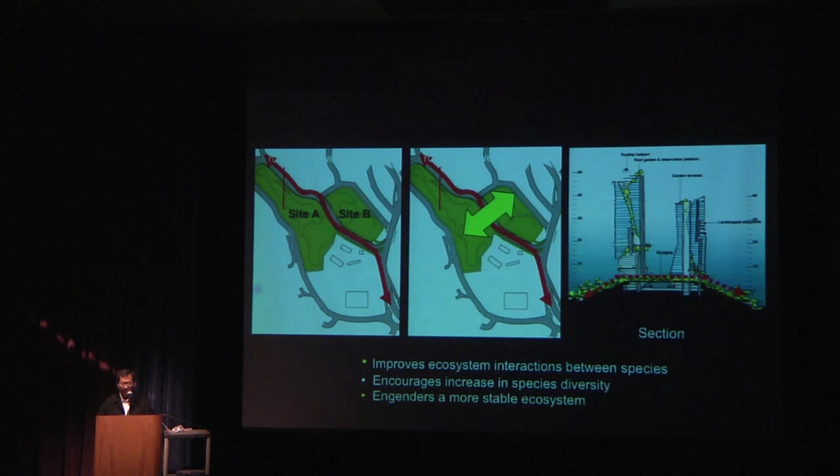With this idea, and it's not an original idea, other people have used it, we develop eco-bridges that link patches of green from one part of the site to the other. This is an eco-bridge that we designed for Singapore, and this is what it looks like from the road level.

This enables species to go from one part of the site to the other in a safe way. And species means not just other species in nature, but we as human beings - we are a species as well - so we could actually walk across from one part of the site.

So if you bring all these together, this is, if you like, an eco master plan, an eco city, where the four eco-infrastructures - the gray, the blue, the red, and the green - are woven into a system, into a whole.

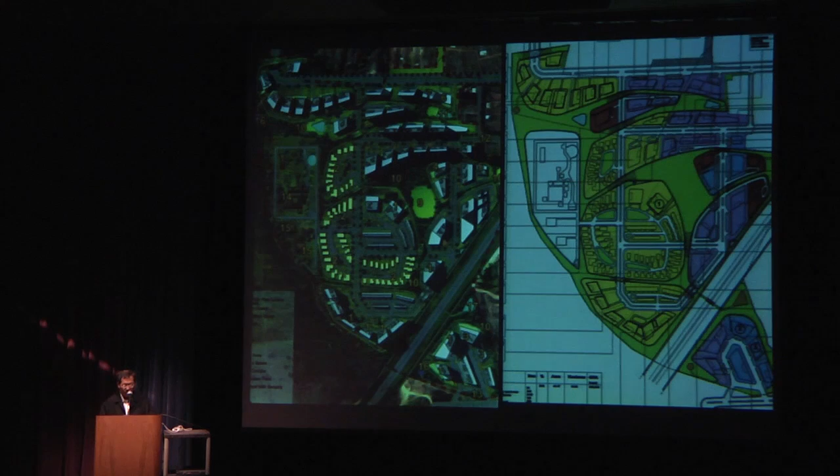And that's the master plan on the right-hand side. On the left-hand side, as you plonk buildings on it - we had to do this to show the client how we would develop the site on the left-hand side.

And so the green design, as the integration of four eco-infrastructures - the gray, the blue, the red, and the green - you can actually use this as a checklist for looking at the work by other architects.

So for instance, if you look at the most famous eco-cities in the world, whether it's Masdar or Dongtan, you find that they have very clever engineering systems because they're designed by engineers, and they have a certain amount of blue eco-infrastructure because the water is recycled to some extent - but extremely difficult for Masdar because it is out in the desert, and the water that gets to that city has to be desalinated. You have to use energy to create the water.

And you have human infrastructure - Dongtan has interesting new legislation systems. But you find that both of them have patches of green, but not a continuous ecological infrastructure. So without this component that's missing, it's not a truly comprehensive eco-city.

And so you can use this as a guide. And not only that, what we're doing now is to be able to quantify this - we're able to sort of score it.

So then when we look at a scheme, we look at to what extent it is clean technology, to what extent it's carbon neutral, to what extent the water loop is closed, to what extent there is a new way of life, a new way of living for the users in the building, and to what extent the level of greenery that we introduced in the building, and how continuous it is to link to the green in the hinterland. And so you have a scoring system, but again, a scoring system can be very arbitrary.

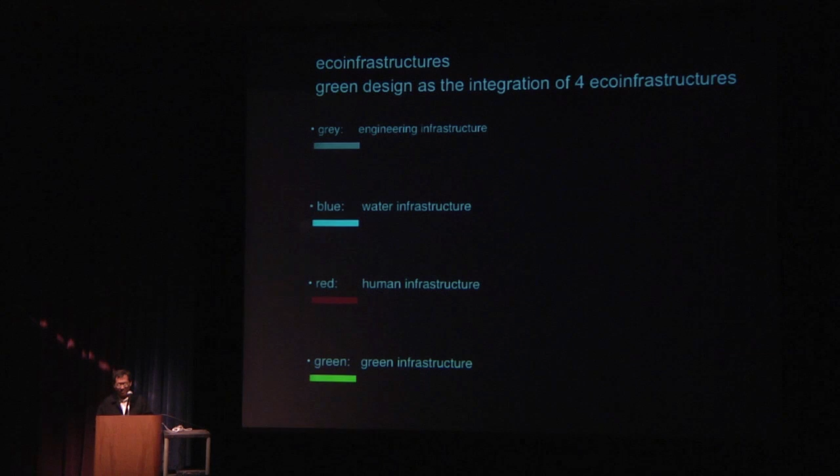So I'm going to close in a minute. I'm going to talk about - we talked about today about designing, bioclimatic design, as design to relate to the climate of the locality, as a passive mode low energy structure. We talk about the different ways of designing low energy buildings.

Looking in terms of optimization, if you like, of different modes - you start from optimizing a passive mode, then you optimize a mixed mode, then your full mode, and then your productive mode, and then you have your composite mode. And in this way, you achieve as low energy a building as possible by design, rather than designing a building and making sure the full mode systems are green. I thought that's rather a ham-fisted way of doing green design.

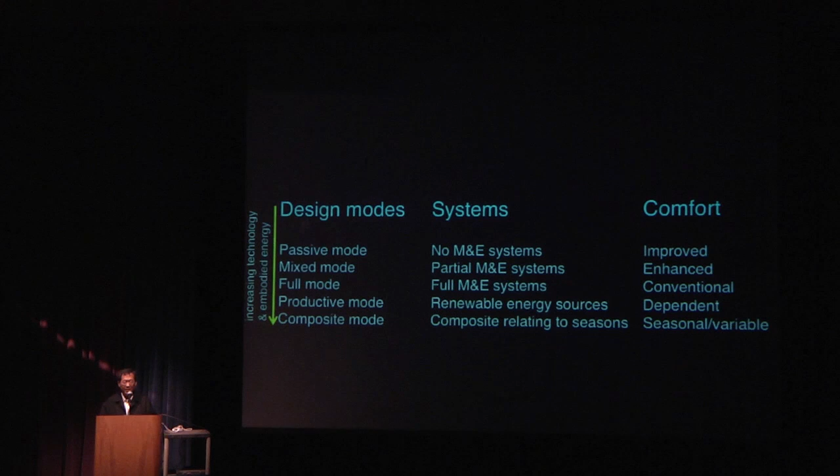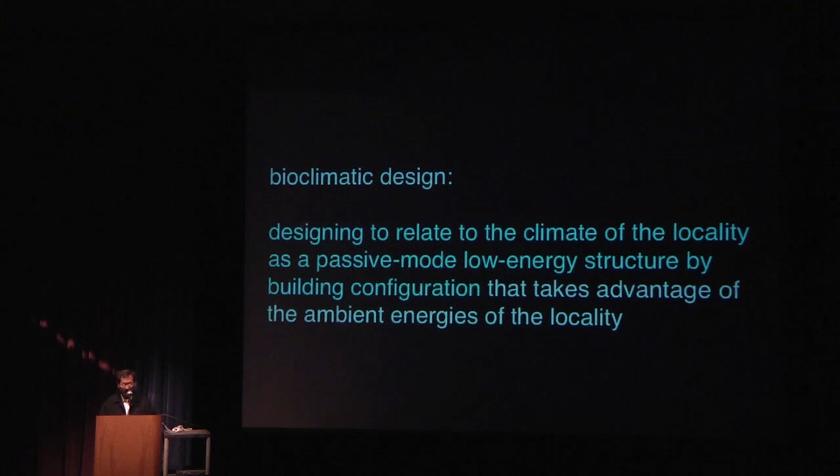But this is a way of looking at passive mode, which is really bioclimatic design. Bioclimatic design, passive mode, has to start by designing with climate of locality. So the shaping of the building is important, and we need to take advantage of the ambient energies of locality.

I'll be happy to answer any questions you might have. But you didn't ask the last time. Oh dear, have I covered everything then? What shall I do? Shall I tell you architectural jokes then?

Could you speak about the economic sustainability of the projects? These large projects, which are wonderful to look at, but the maintenance of them and the energy it takes to keep these buildings up - I wonder if you could comment on that.

Oh, it's like talking about your actress girlfriend. A lot of energy, expensive to maintain.

As I mentioned earlier on, there is energy and water savings, but you don't get it straight away. It'll take about 5 to 8 years in most of our projects to get the return on investment back from the capital investment in these systems. That's the criteria we use when we talk to clients. There's a slightly higher capital cost to begin with, between 4 to 8%. To give us a bit more leeway, we sometimes tell them maybe 10, 15%, so we can experiment a bit more and put some new systems in. Then you get your money back from this increased capital investment between 5 to 8 years, and after that you have continued savings in water and energy.